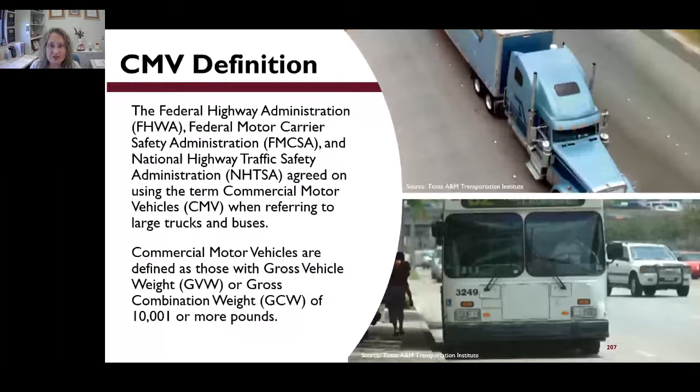This afternoon, I just want to spend a little bit of time as we go through this to provide you an overview of some of the activities we've been cooperating with FHWA and the other partners that Martha mentioned, dealing with CMV safety in work zones. One thing I wanted to do is start out with a definition just to let you know what we mean when I'm speaking of commercial motor vehicles. This is a definition that's been agreed upon by FHWA, FMCSA, and NHTSA. It's looking at vehicles with a gross weight or a gross combination weight of 10,001 pounds or more. And then when we're talking about work zones, we are looking at areas of the roadway where construction, maintenance, or utility work is occurring. So that's a pretty standard definition for those of you familiar with work zones, but I want to make sure we're all on the same page as we get started here this afternoon.

Quickly, I wanted to highlight some of the statistics for you. In 2019, we saw that there were 762 fatal work zone crashes. Of those, when you compute these numbers I'm showing you on the screen, 33% of those crashes involved a commercial motor vehicle, and then 35% of the fatalities in work zones involved a commercial motor vehicle. Again, that's when you combine those truck-involved and bus-involved statistics that are showing here on your screen. I provided a link here to a page on the Clearinghouse where you can obtain these statistics as well as many more, as you'll be able to reference these slides later.

So as we see here in this graph, we have a trend of commercial motor vehicle involved fatal work zone crashes, and unfortunately we can see that it's increasing year by year as we look from 2010 to 2019. For comparison purposes, commercial motor vehicle involvement in non-work zone fatal crashes has remained fairly constant throughout the same time period.

At about 10 to 13% of all the fatal crashes. So a lot of times you may hear Martha, Jerry, or myself say that commercial motor vehicles are overrepresented in fatal work zone crashes. That's because in 2019, about 33% of fatal work zone crashes involved a commercial motor vehicle, whereas in non-work zones it's around 10 to 13%.

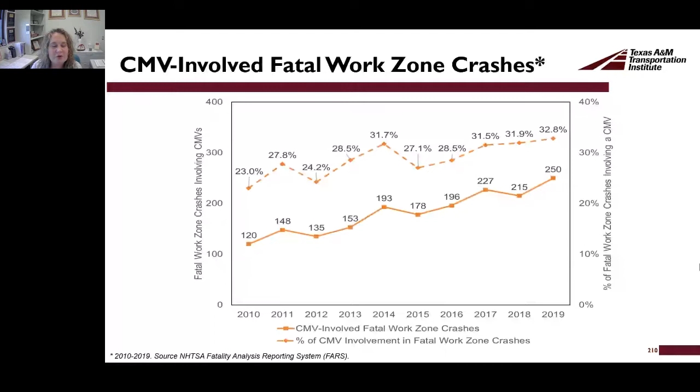Another graph I want to show you is how commercial motor vehicles are involved in fatal crashes by facility type. This is looking at data from 2017 to 2019. These graphs are available on the Clearinghouse webpage, so you can look at them later. We want to see where these crashes are happening and where they're overrepresented.

In this graph, the orange columns are the work zone fatal crashes and the white columns are the non-work zone fatal crashes, all commercial motor vehicle involved. We see that overrepresentation across all facility types, but the largest overrepresentation is on interstates in both urban and rural environments. In fact, CMVs are involved in more than 30% of fatal work zone crashes on urban interstates, and more than 50% on rural interstates.

Now, I'll point out things this data doesn't account for. We're not accounting for how much work is going on out there, which obviously varies year to year. It's not accounting for commercial motor vehicle traffic or volume. We don't know if this is due to more work, more volume, or deliveries in and around the construction zone. We just know that work zones are possibly more challenging for commercial motor vehicles to negotiate, with changed geometries, alignments, lane widths, etc.

But these are just snippets of information for you to think about the trends, why this is an important issue, why we're having this conversation today in this session, and some of the areas we might want to focus on as far as facility types.

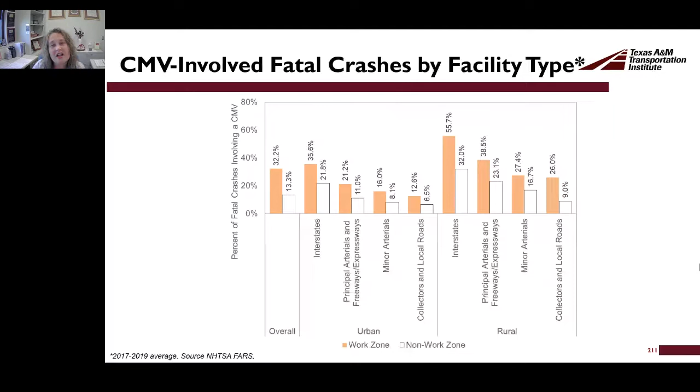So there's a lot of materials out there that you can access on the Clearinghouse to give you information about strategies that can help hopefully impact or reduce CMV crashes in work zones.

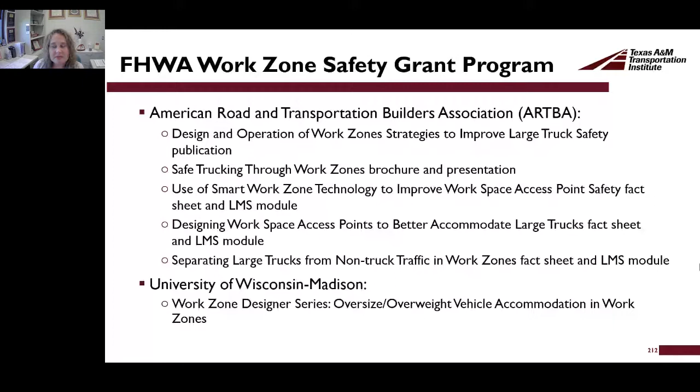Another thing FHWA has been doing is holding webinars, meetings and symposiums. We tend to have a session at this type of conference every time about large truck safety or commercial motor vehicle safety, and we also highlight issues dealing with commercial motor vehicle safety at National Work Zone Awareness Week. All of that can be targeted at the commercial motor vehicles themselves or at the passenger car drivers.

One thing I failed to point out when discussing the statistics is that not all of these crashes are at fault of the CMV. Sometimes it's a commercial motor vehicle hitting another vehicle, but in other instances it's the other vehicle hitting the commercial motor vehicle. So we need to make sure that when we're talking about this and engaging with stakeholders, we're looking at all sides and all pieces of the puzzle.

We want to make sure we're educating and involving stakeholders and trying to mitigate those crashes—from the passenger car driver, to the truck driver or CMV driver, to the DOTs and state agencies, to police—bringing all those stakeholders into the conversation. We do that through the mechanisms shown on screen: meetings, symposiums, and publications during National Work Zone Awareness Week.

So what are we doing right now? One thing that I wanted to spend time highlighting a little bit, and some of you from these opportunity states are well aware of these items that have been going on.

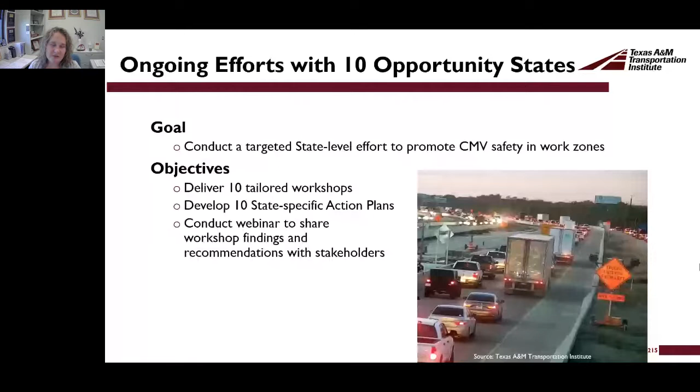I'm sure Kirsten will explain this more, as I think it's part of her presentation, but we like to highlight those anytime we talk about CMV safety in work zones. That is all I have for this afternoon, and I appreciate your time. Martha, I'll hand it back over to you.

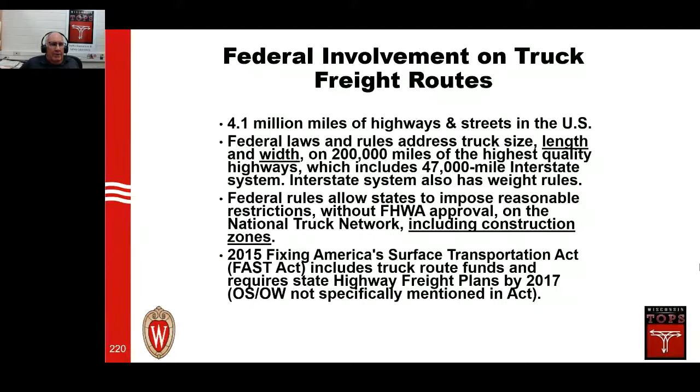I'll bring your attention to the fact that in that requirement for developing highway freight plans, there was no mention of oversize and overweight—it's not specifically included anything in the act. However, I'll point out that some states did take the opportunity, when preparing their plans, to discuss oversize and overweight. Next slide, please.

Now we'll talk a little bit about state responsibilities to ensure safety and mobility. I'll point out that in this presentation we will not only be talking about safety, but also mobility, and how they work together as far as oversize, overweight. All states have laws and regulations setting their own size and weight limits for vehicles, as long as they're consistent with applicable federal regulations.

Also, there is no federal mandate for the height of vehicles. A lot of this has to do with the interstate development that started in the 1950s, when bridges were typically built to a standard of 16 feet. However, some states have higher and some lower height limits. So just because the interstate is typically built with 16-foot clearances, that doesn't mean anything as far as what a state may set as their legal height limits.

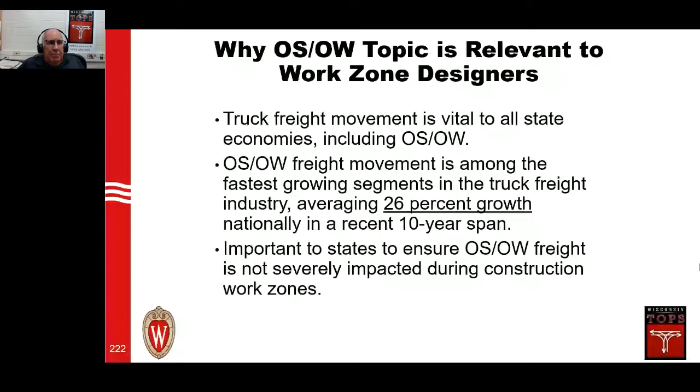One of the things we will talk about a lot is that all states have oversized and overweight permits. When a carrier wants to haul an overweight load, they need to get permits from their individual states. The states have the sole responsibility to issue these permits. There's no federal permit required for oversized, overweight loads - these are state responsibilities.

Oversized, overweight permitting processes are complex, and every state has its own laws, regulations, and processes for requesting and issuing permits. Some states have as few as 1 or 2 different types of oversized, overweight permits. Some states have more than 20 different types, depending on the load and so forth.

So we think designers need some basic knowledge about their state's oversized and overweight permit rules and procedures in the states where they're designing their work zones. Designers need to know what types of permits are out there.

Is it a single trip permit - in other words, good for only one load - or do some states allow multiple trip permits that could be valid for an extended period of time, maybe a year, for instance, allowing numerous loads on certain routes and so forth. Designers need to know that kind of information.

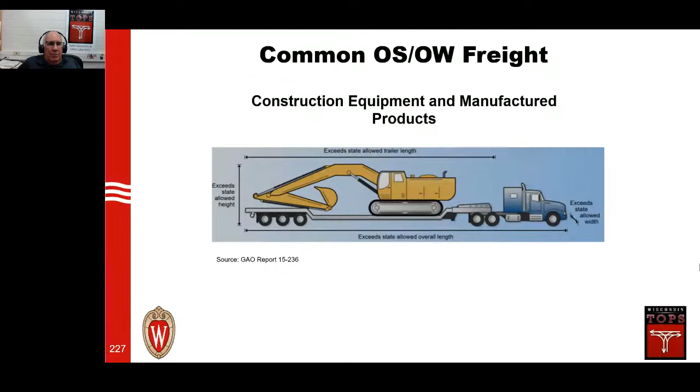We see agriculture planting and harvesting equipment, raw forest products. As the agriculture industry grows, planting and harvesting equipment is getting larger, and as a result it's expensive and used in multiple places, so it needs to be transported. We've also seen a lot of growth in other types of oversized, overweight freight, such as wind energy equipment, increasing modular home development, and energy, gas and oil equipment having to be hauled. There's just a lot of different types of equipment being moved that requires a permit.

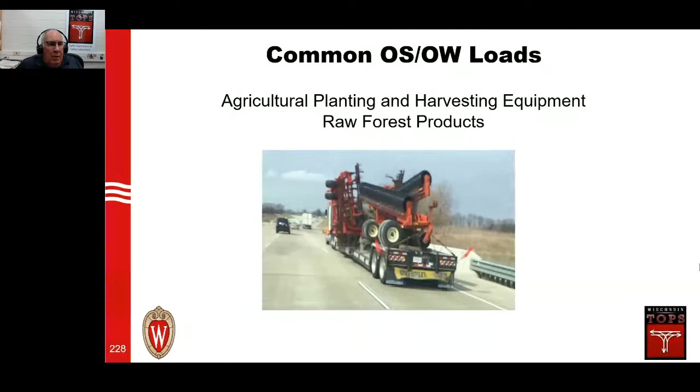We think even at the early stage of program planning for projects, oversized/overweight should have discussion in the development of which projects and timing of projects are done, included with the schedule of all other user groups—in other words, what other types of projects are happening and when they're going to be done.

To address this, a number of states have been looking at using different types of products they have in their planning divisions as a starting point for oversized/overweight discussion alongside all these other groups considered when projects are built.

As mentioned, some states did include oversized/overweight in their state freight plans. If that's available in your state, that's a good starting point.

Some states have talked about critical route pairs. The State of Oregon, for instance, developed critical route pairs as a policy—if they're going to do construction on one route, they try not to have construction at the same time on the critical parallel route.

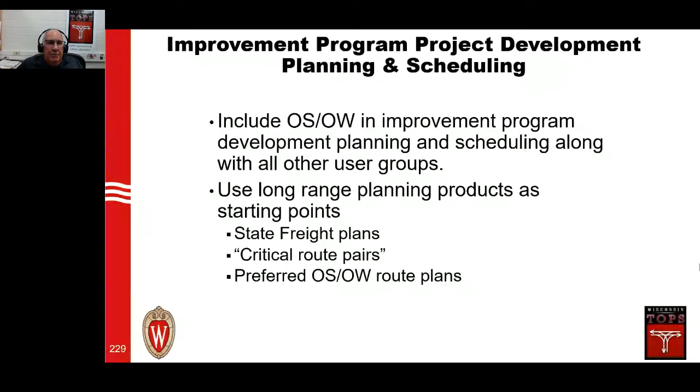So if our designers work on one of these projects, they should take a look and see if there's accommodation, or how much it's going to impact the oversized and overweight loads on their system.

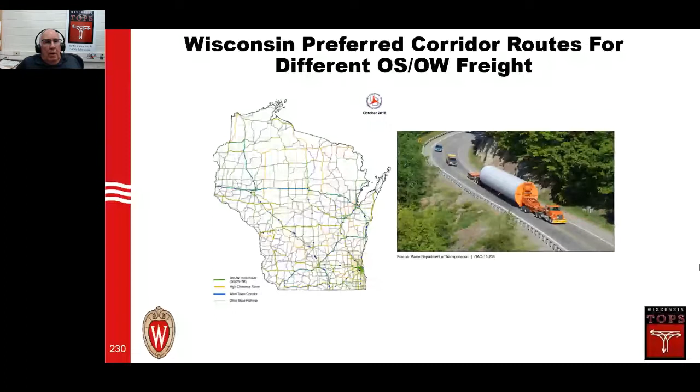Let's now focus on individual projects and project transportation management plans, TMPs, and their development. For all our TMPs, our goal is no surprises during construction—minimizing or eliminating the need for change orders, including any change orders due to oversized/overweight issues that weren't caught at the notification stage of how it may impact that industry.

We think a good practice is to include oversized/overweight stakeholders—there are trade associations in many states, as well as major carriers—and they should be involved along with all other stakeholders in the TMP development stage and included in those discussions. We think oversized/overweight should be considered when detour routes are evaluated.

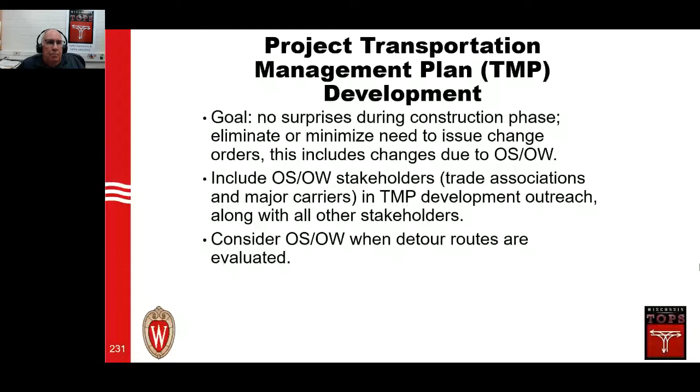When evaluating alternate detour routes: what are the existing size and weight restrictions on any proposed or considered detour? Are there overhead obstructions? Look at intersections that may be bottlenecks, and any restrictions due to construction planned on those alternate or detour routes.

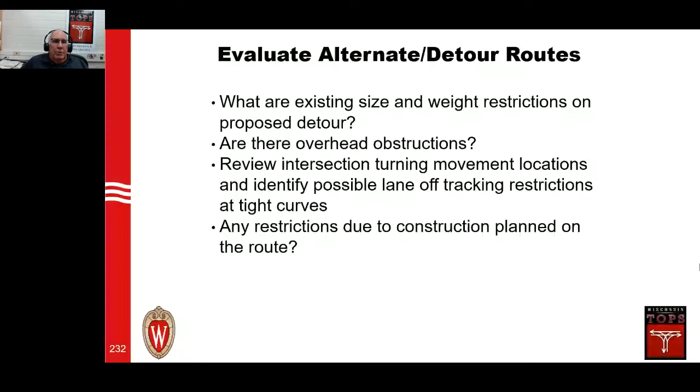Work zone geometric and strategies—this is a list of many different types of traffic management techniques we use for our work zones, and some present more of a challenge than others when it comes to handling oversized and overweight loads.

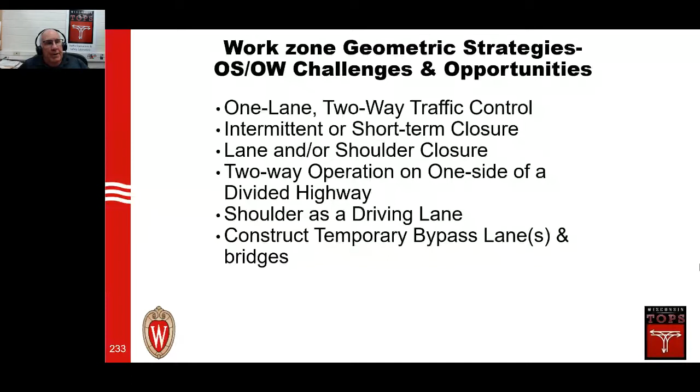One way we might address oversized/overweight is through scheduling of our projects. For instance, we know right now we're doing a lot more night construction, or adjusting time of day, to avoid or mitigate congestion, and this may very well work well for oversized/overweight too.

I put a caution here, however, that as designers you need to know that oversized/overweight permits may use a different definition of time, such as daylight hours for when permits are valid, while our contracts may use a clock time for when certain operations can take place. So that's something that has to be worked out.

We think the TMP should either restrict when permits are valid and/or when work can be done. Some states have experimented with day-of-week operations—restricting oversized/overweight traffic or work zones, say Monday through Thursday, then getting off the road Friday, Saturday, and Sunday to let regular traffic through, which may also help mitigate congestion.

So there are different approaches that, if established and put into place at the TMP stage, will work well for all of our projects.

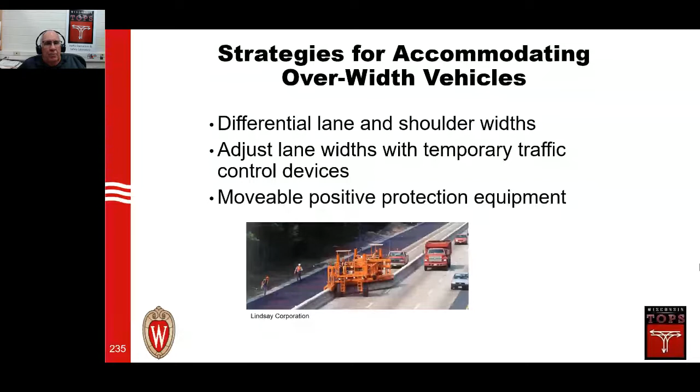Several different strategies for accommodating different types of loads. For over width vehicles, differential lane and shoulder widths can be used, adjusting lane widths with temporary traffic control devices, which can be moved easily to accommodate the oversized overweight load when it comes through. We have new technologies and equipment that can even move positive protection equipment. It works well for time of day scenarios and is very useful for oversized overweight loads. Here's some common over width vehicles and how changing lane widths and using available shoulder widths may work well for oversized and overweight loads, so we don't necessarily have to detour them.

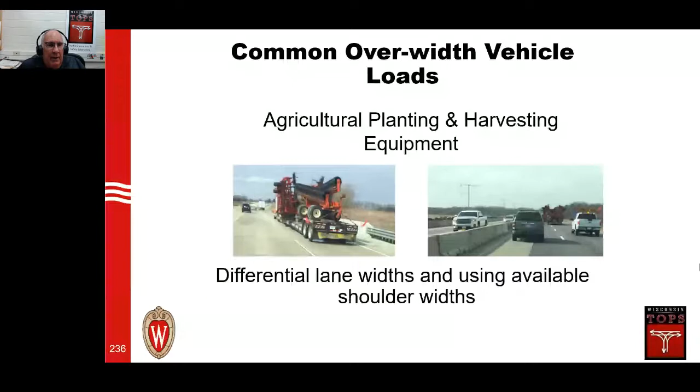We know that some states use shifting traffic to one side of the roadway. We caution that they need to look at the types of loads and what widths can be accommodated, especially if there's positive protection on one side and permanent protection on the other that may interfere. States also try not to detour certain types of loads, for instance modular homes. They would just as soon keep it on route. Their policy is to maintain sufficient width on their projects so that certain loads don't have to detour off, because they're more of a hindrance if they get off their usual route, causing more challenges on detour routes.

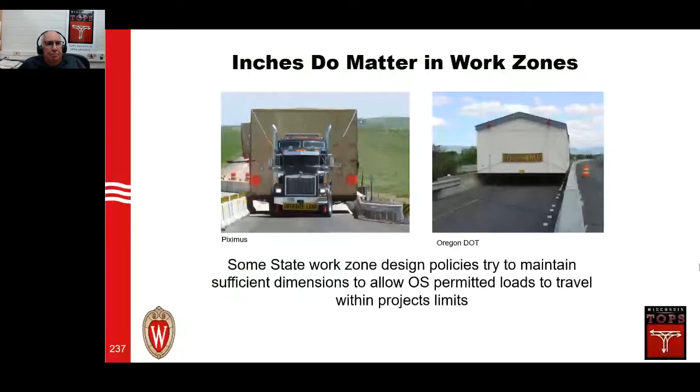Strategies for overlength vehicles. There's a number of things on this list that may serve value as ways to accommodate overlength vehicles.

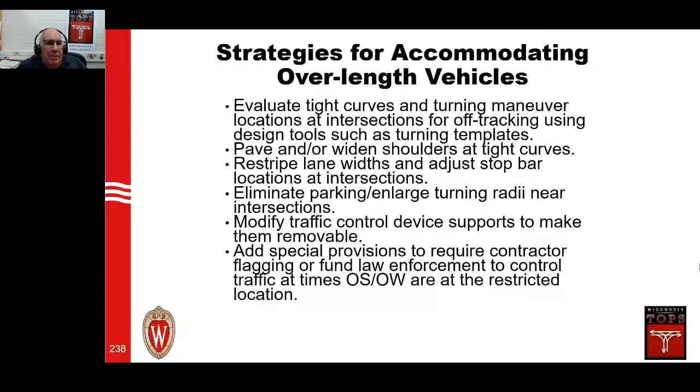Overweight loads are perhaps the biggest challenge, trying to find acceptable detour routes, especially for very heavy vehicles, since loads on off-project detour routes may be a challenge. There are different kinds of strategies that may be valuable, working with the permit agency to try to accommodate oversized, overweight loads.

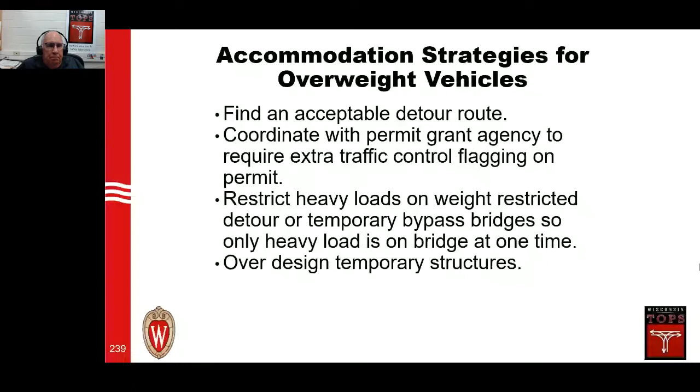Over height vehicles: there are a number of different strategies agencies have used, such as different types of falsework, changing the plans, using telltale systems, warning systems, and diverting over height loads onto lanes with sufficient higher clearances. Again, coordination and communication with the permit agency ensures these get into the permits.

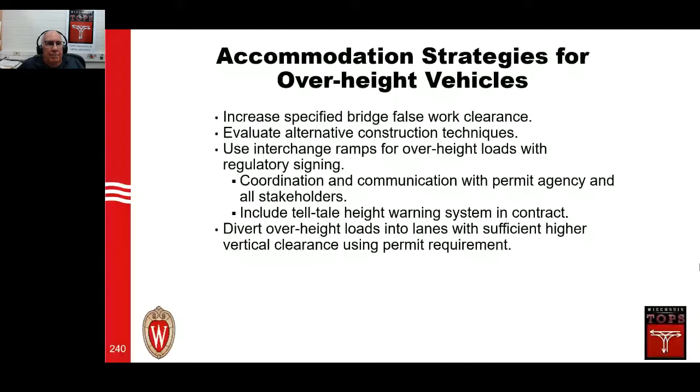In conclusion, oversized, overweight stakeholders are important to our highway users, and they need equal consideration in TMP design discussions as we develop our TMPs. The important thing is timely communication and coordination with state permit granting agencies, as well as stakeholders throughout the TMP design process, which will go a long way toward implementing a successful project.

As Andrea Bill mentioned yesterday, this presentation is based on a design series publication that we finished. It's now up on the National Work Zone Safety Information Clearinghouse, and you can find it by searching UW-Madison and our design series publication. Thank you.